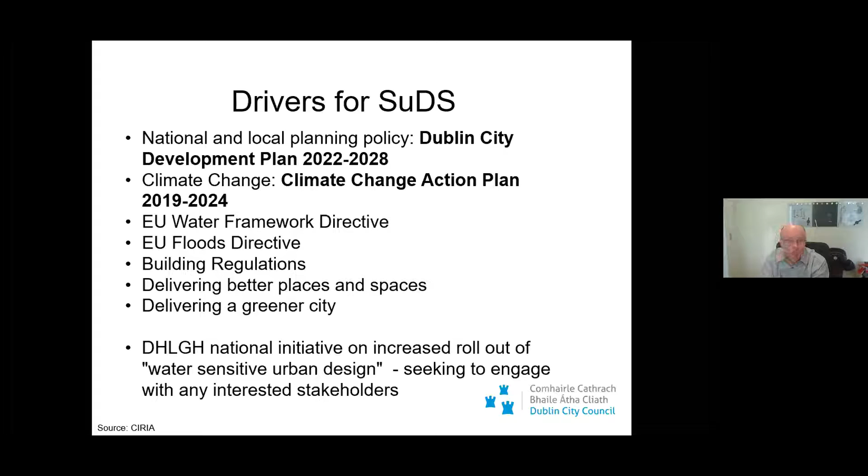I've been talking about SuDS and the assumption everyone knows what I'm talking about. It always strikes me that maybe there are one or two people who don't. What we're looking at basically is trying to mimic natural drainage processes. So you're looking at trying to intercept the water at surface level where it falls. You're looking at managing runoff close to the source.

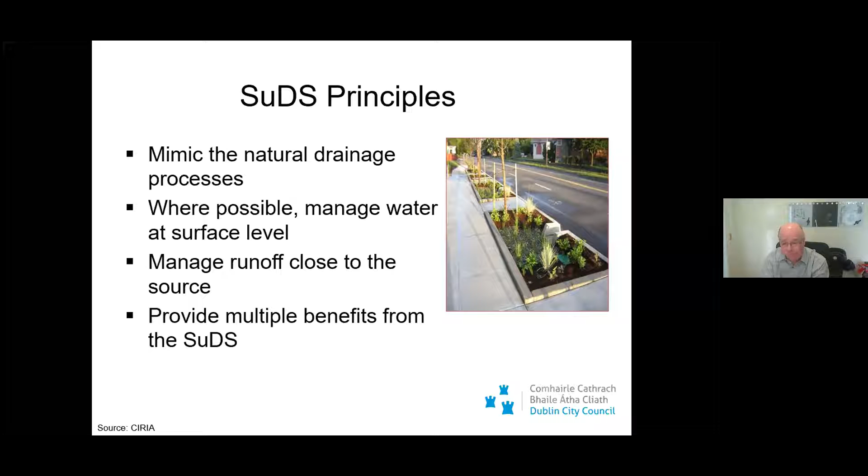That's much better for water quality. It's much easier to deal with it spread over a larger area rather than trying to put everything into a little pipe and looking after that further downstream. There are multiple benefits to be got from SuDS. They include your water quantity and quality, like we've already talked about, but they can also give you a great biodiversity gain.

And I think only in the last couple of days, Dublin City Council went to public consultation on a new biodiversity action plan. That's something you're going to be hearing a lot more about. We're all aware of, I was going to say birds and bees, but certainly pollinators. There are problems there. There are a lot of issues where we're losing biodiversity, and one of the key things in tackling climate change is to get it back.

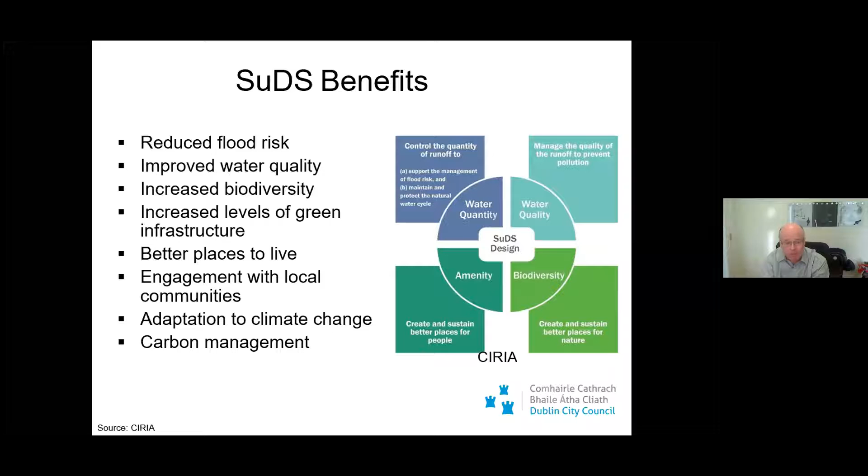SuDS well designed can also give us amenity for local communities, can help us to adapt to climate change, can help us with carbon management. I won't talk in any great detail on the SuDS management train. This is a concept some of you will be aware of.

Again, rather than putting everything into a pipe down to a big tank and trying to deal with it there, the idea is you deal with your stormwater in a couple of different places. You take it out as you go along. You're dealing that way with your quality issues, and you're dealing with your overall volume.

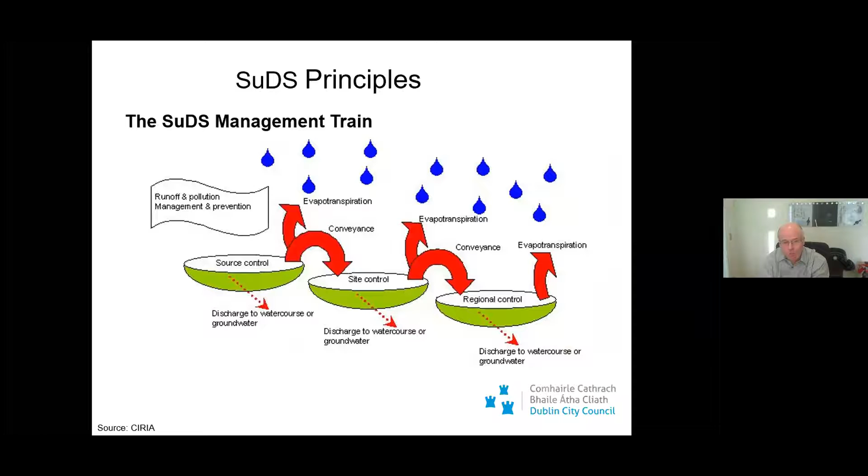I'm going to just talk very briefly about a couple of different SuDS types. I'm not going to start going into green roofs or whatever. That's not really relevant to this talk. I believe there's massive potential in urban transport projects for porous or permeable pavements. Sometimes you can get a bit of bad press. Sometimes people on roads believe these things won't stand up long term.

The fact of the matter is we have permeable pavements in container docks in South America that are standing up 30 years later. If these are well designed, they can function just as well as anything else. The idea, again, for anyone not familiar, and I assume most people are, is that water, rather than running off to a drain, actually soaks down through that surface.

You're dependent on a bit of infiltration, but not necessarily either. Even if there's no infiltration potential, you've got quite a lot of storage underneath there. You can have an overflow to a surface water system. It will slow down and absorb a lot of your problem water.

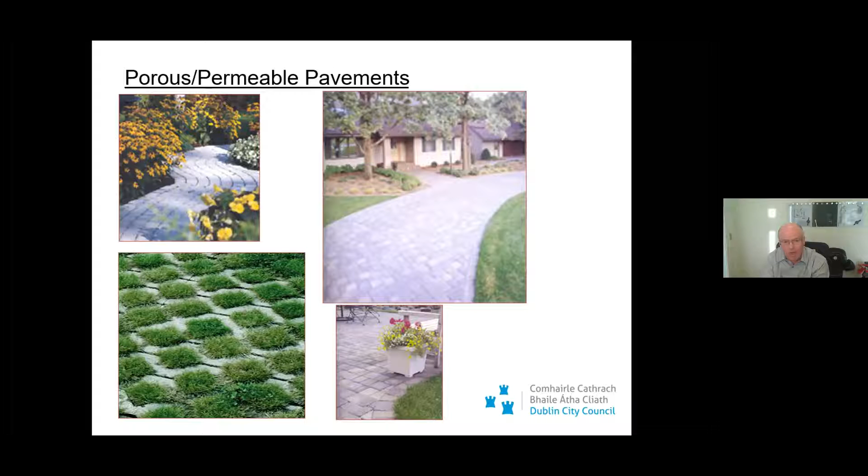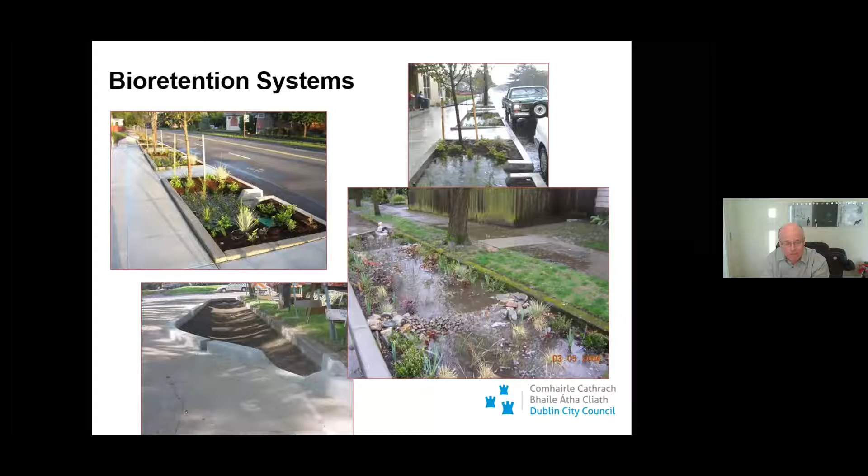Bioretention systems I mentioned already. Again, huge potential for use of these in urban areas. Again, the idea is water goes into the bioretention area. It can either be taken up by plants who need it anyway, it can sit there in storage, you can have filtration media underneath it. You can have a certain amount of storage before it overflows to another system.

Infiltration, I've already mentioned. You will hear people talking about boulder clays in Dublin and lack of infiltration capacity, but even with boulder clays, there is some small bit of infiltration all the time. And again, most of the time what we're trying to deal with for quality is our smaller storms. These kind of systems with a little bit of storage will take those storms no problem.

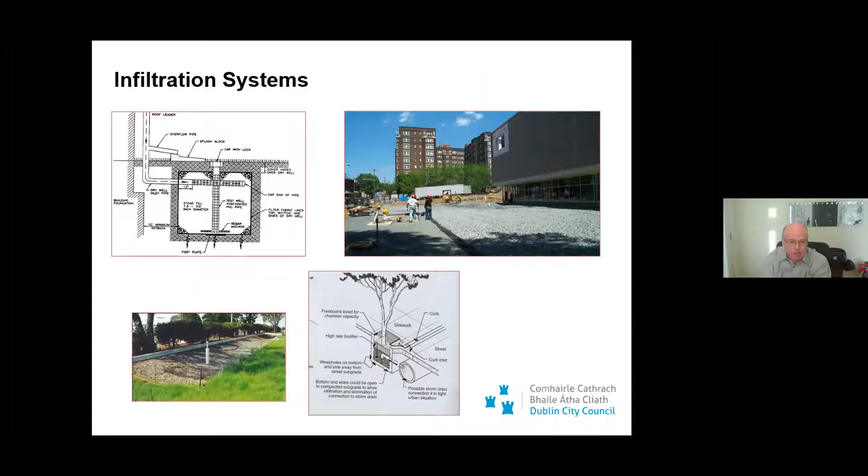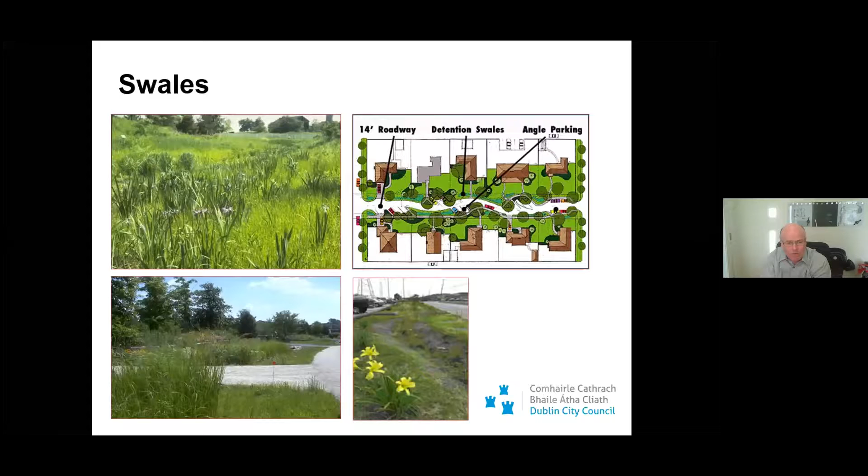I'm not going to talk too much about swales. Swales are probably very relevant in housing estates or areas where you have a bit more space, possibly less so in transport projects. But again, if they're done well, a swale can work even in a relatively dense area. Rain gardens, again, similar to biofiltration.

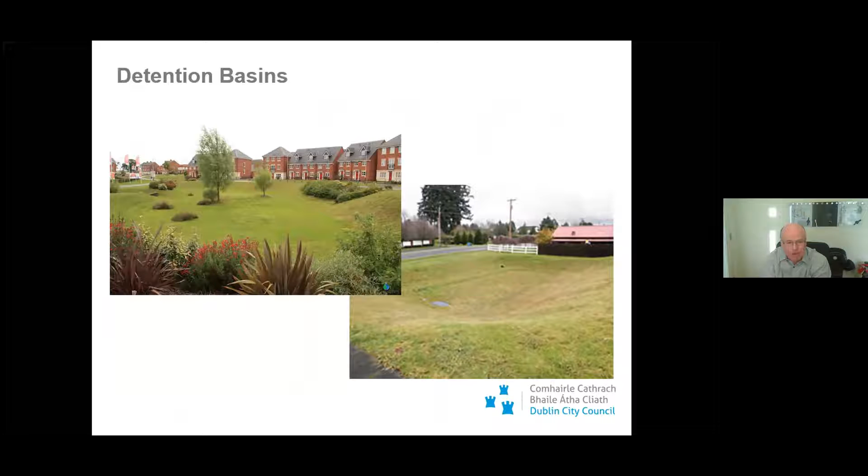Detention basins and retention ponds are quite similar ideas. Again, you can have a certain amount of amenity value here. But also importantly, you may say these can't be used in urban areas. You know, there's always potential to use a roundabout. There are always little areas that can be considered. So there may well be potential for these in transport schemes. Retention ponds, probably less so. Again, you see these in motorways to an extent, less so in urban areas, but they have got potential.

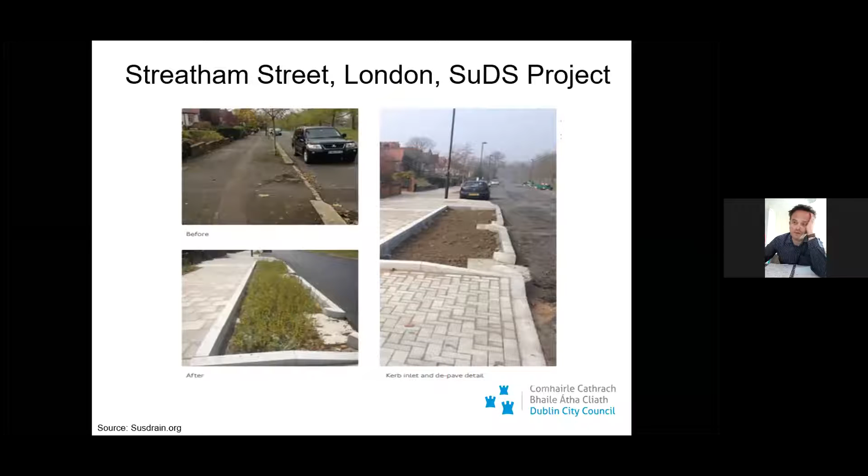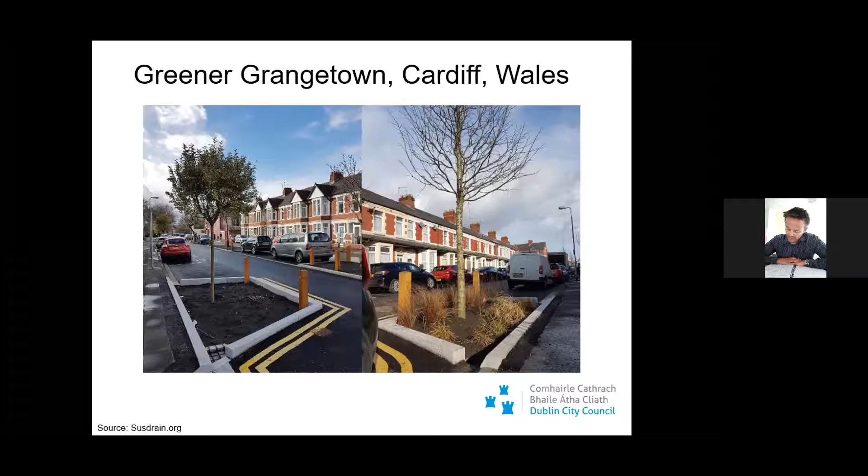The next one is Greener Grangetown in Cardiff, Wales. This is a massive project where they retrofitted about 108 rain gardens into Cardiff city centre. This removes 40,000 cubic meters of rainfall runoff from entering the combined sewer network. That's about 20 swimming pools that they are saving from getting into the combined network over the space of a year. Now that's a massive volume of rainfall runoff.

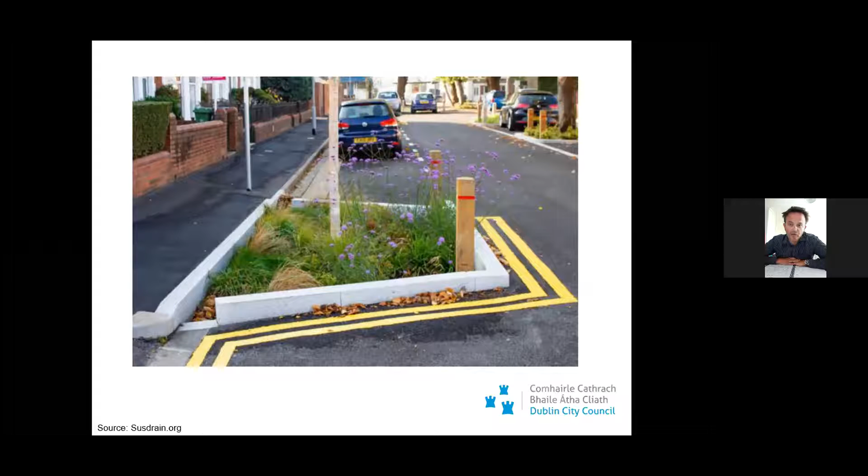The next project is the Grey to Green Sheffield project, where they put in a 1.6 kilometre green street with rain gardens, swales, bioretention systems in the city centre. Now this project is one of the biggest retrofit projects in the UK, and I just think it'd be excellent if we can get something like this in Dublin. Even a small percentage of this in Dublin would be just excellent. There's a few photographs there, Park, if you want to click through.

You want that one, Neil? Yeah, this is how these systems work. Basically, they take the runoff from the roadway, and they store it at the surface level. Therefore, it either attenuates slowly and goes back into the combined network, or it infiltrates into the ground underneath.

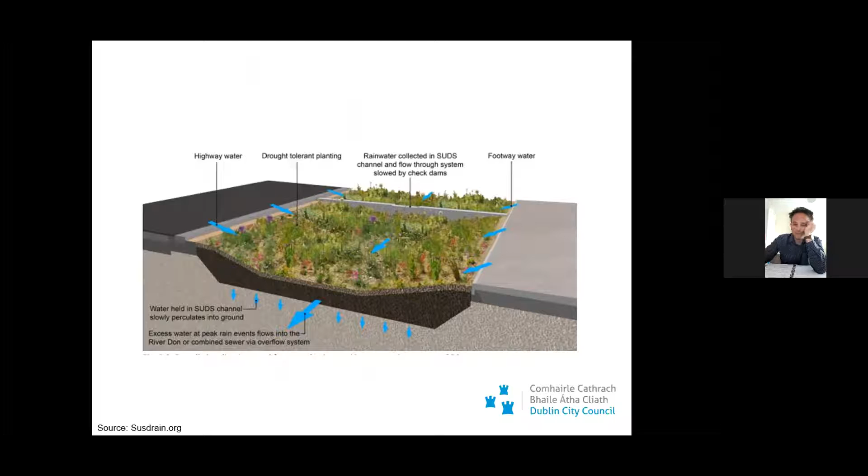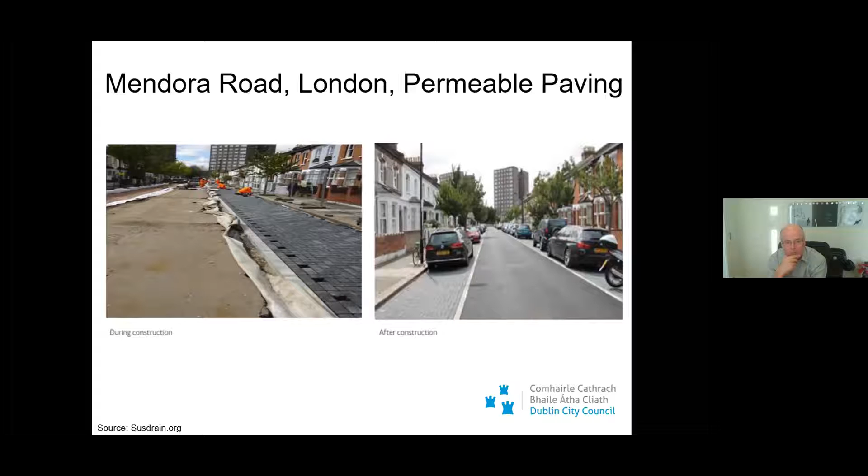Next slide there, please. Worth mentioning there too, Neil, that you're removing the need for a piped and gully system, or even if you want a couple of gullies for overflow, there's a much lesser requirement for them in that kind of system. Yeah, correct.

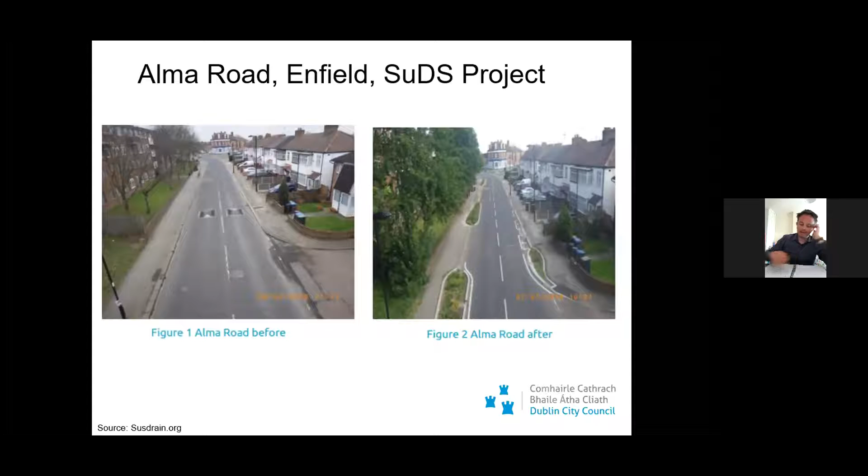Again, another example, over in the UK, is Alma Road, Enfield. This road had a number of issues with flooding and pollution into the local river. Basically, it's a retrofit scheme where they've retrofitted a number of rain gardens into the street, and this has reduced flooding and pollution. They did a few calculations on this, and the rain gardens actually store a 1 in 5 year storm event, which is very impressive.

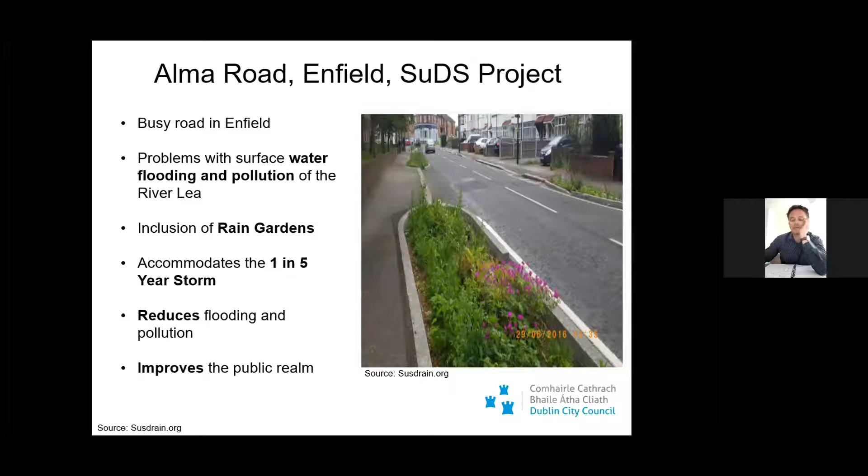If you look at the next slide, you can see it improves the public realm too, with nice plants and greenery. So it benefits so many different aspects. Next slide there, please, Padraig.

This is a scheme, again in the UK, in North Street, Keighley. This is an example of where they've retrofitted a number of tree pits. Next slide again. Basically here they're adding an extra traffic lane, and these tree pits were put in. They act as stormwater attenuation and treatment pits, where they actually store the water and treat it. A few calculations were done showing they store a 1 in 30 year storm event, which again is an excellent storage facility.

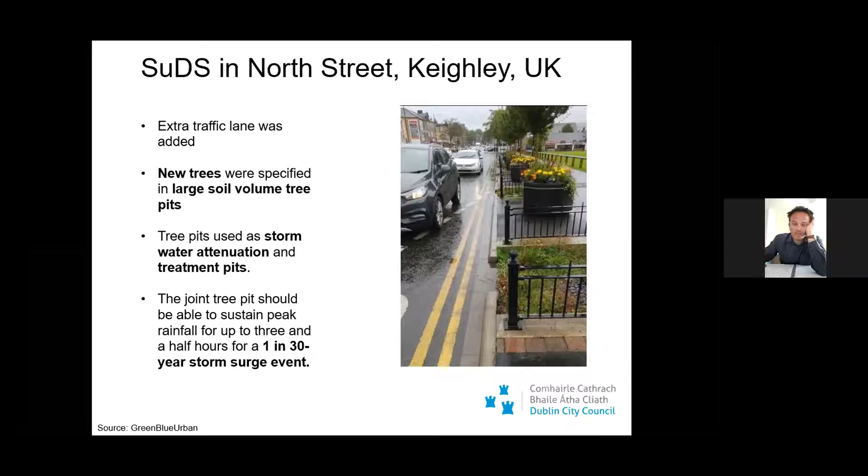As Padraig was saying earlier, we're trying to capture the rainfall runoff on the street surface for as long as possible before it either goes back into the combined network or infiltrates into the ground. So all these types of SuDS are actually very helpful. Next slide there, Padraig, please.

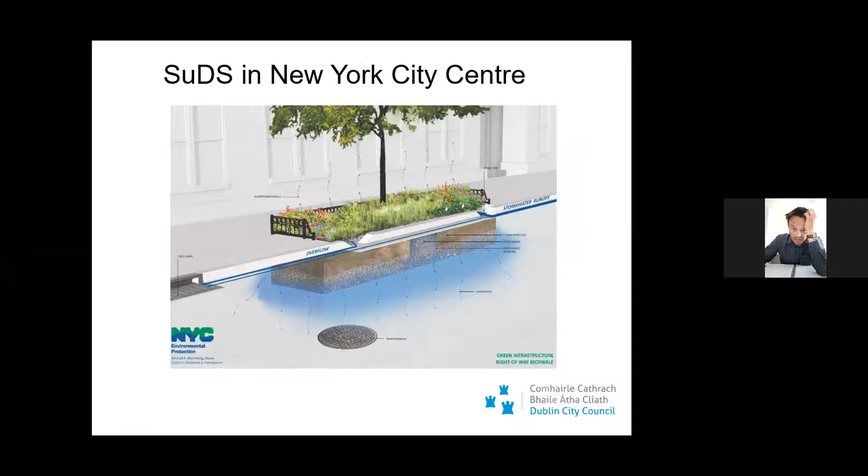In New York, they've put in a number of rain gardens. Would you believe they've put nearly 3,000 of these rain gardens into the city centre? There's a few more slides there, Padraig, just to see how these rain gardens operate. Like the numerous examples before, these store about 5 or 6 cubic meters of rainfall runoff from entering the combined network in New York City. So again, it's the same principle.

They're storing the rainfall runoff on the street surface and slowly releasing it back into the combined network or infiltrating it into the ground. So again, this is reducing your flooding incidents. It's reducing your combined sewer overflows into the rivers, so reducing pollution into the local rivers. So some of these are just excellent ideas to incorporate into the road structure.

Now, with all the projects ongoing in Dublin City, such as BusConnects and some of the big cycle projects, which we'll talk about later on, this would be an excellent idea, even to trial it for a couple of hundred meters, just to see how it would work and if it could be incorporated on a bigger scale. It would be good just to trial it out and see if it helps to store the rainfall runoff. It's just something that I've seen recently. Next slide there, Padraig, please.

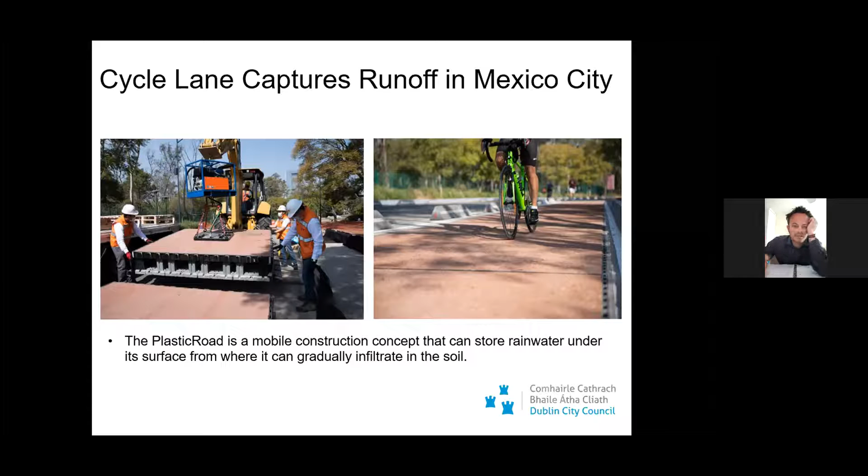Opportunities to implement SuDS in Dublin. Dublin City Council came out recently with the Public Realm Master Plan. This is a huge plan for the public realm in Dublin City, with 90 plus projects proposed over the next 10 years. So there's huge potential to put some of these SuDS that I've just shown you into some of these upcoming public realm projects. Next slide there, Padraig, please.

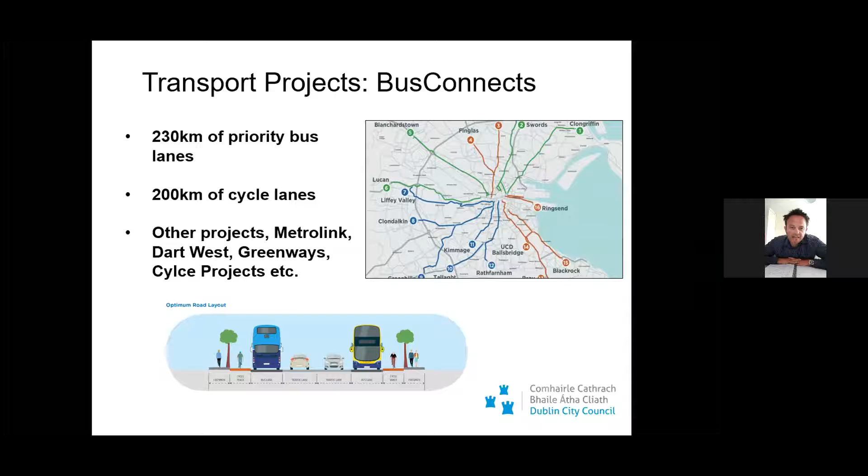Again, there's huge transport projects ongoing. You've got BusConnects, Metrolink, the DART West, greenways, cycle projects. BusConnects itself is 230 kilometers of new bus lane and 200 kilometers of cycle lane. So there's potential there to put in a number of these examples we've seen, like rain gardens, bioretention areas, swales, wetlands. There's definitely potential there for this. Next slide there, please, Padraig.

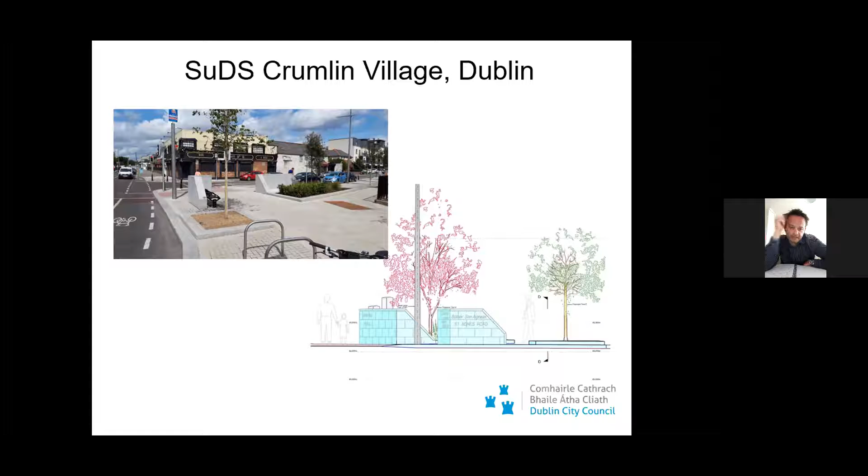So again, as Padraig was saying earlier, you're basically slowing down the process of rainfall runoff going into the combined network, and mitigating against flooding problems and CSO problems. So this is a very, very good example. The next slide then, Padraig, is another example of SuDS in Chatham Street. This is the park section.

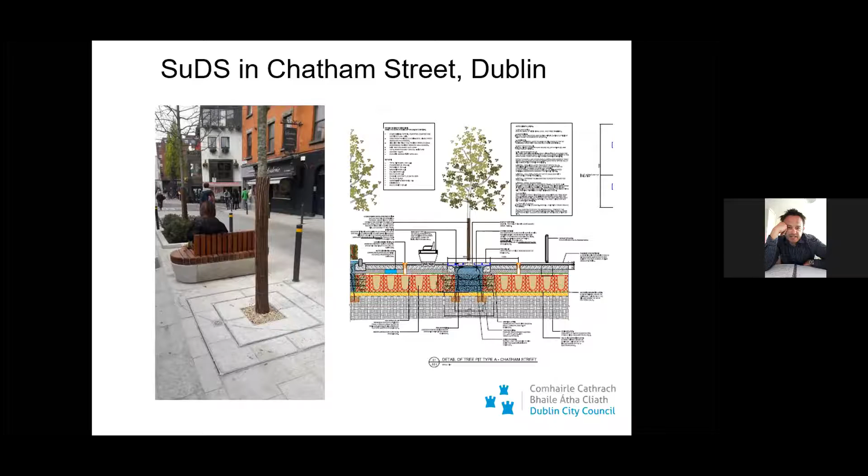I put in a number of tree pits and rain gardens in Chatham Street. Again, it's the same principle. These systems are taking the rainfall runoff off the pedestrian zone there, quite a significant area. And this is inner city Dublin. This is just off Grafton Street, where the whole area is serviced by a combined network.

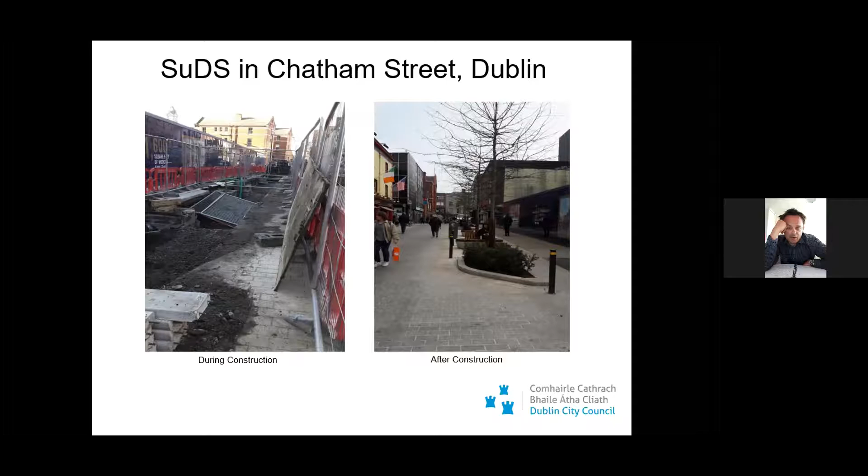So these tree pits, when it rains, the runoff will go into these tree pits and the large storage areas within them, and it'll be stored in there and then gradually fed back into the combined network. So again, this is a great case to show where we're trying to mitigate against flooding and CSO spillages. Next slide there, Padraig, please.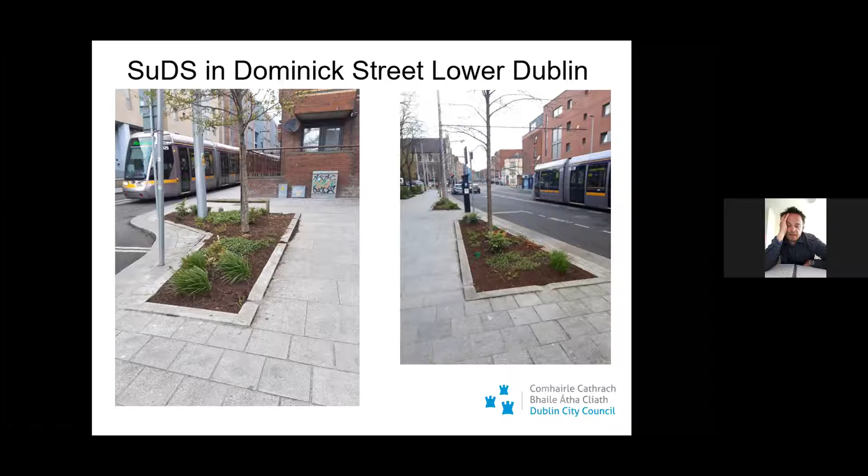So these things do work, you know, if they're put in place and they're well maintained and managed, they will work. So they will work in Dublin City, and I've already shown you a couple of examples of the UK, but there's so many examples of these around the world, and there's no reason why these can't work in Dublin city centre, you know. Next slide then, Padraig, please.

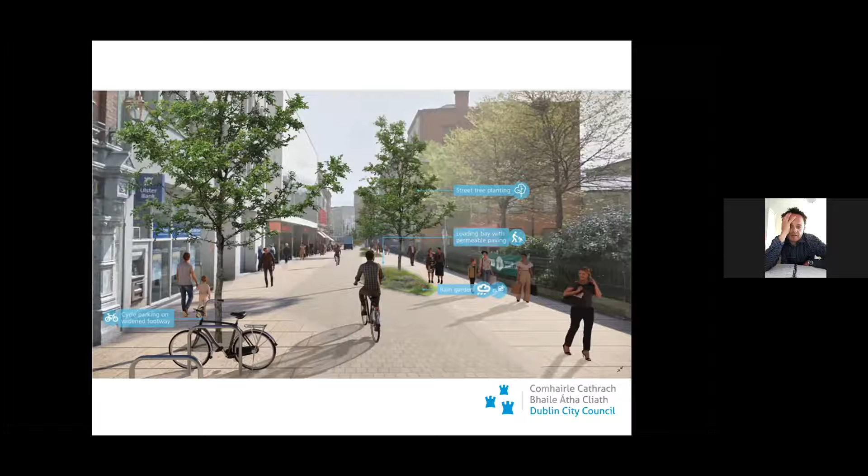This is a project we're working on in Suffolk Street. It's just a public realm project, and it's an example of where possibly we could incorporate some rain gardens and tree pits into the fabric of the road there. I think it's going to be pedestrianised anyway, but it's a very good example of where there's possibility of incorporating rain gardens and tree pits and these SuDS systems that we've shown.

And then again, this is part of the Suffolk Street project too, where at the junction of Suffolk Street and Grafton Street, there's a potential maybe to put in a rain garden to capture the runoff from Grafton Street. The big problem with Grafton Street is there's a lot of granite on it, and when it rains, the runoff flows very quickly off that granite, and it all flows down Grafton Street to this junction. So there's a potential here to put in some sort of rain garden to capture that rainfall runoff.

And it's again back to the two issues it's going to resolve. It's going to resolve flooding in this local area, and also it's going to slow down the rainfall runoff going into the combined network, which again serves this area. It actually looks very well too. This is only a photo montage, but this looks good. If it's well maintained and managed, it'll enhance the whole area, you know.

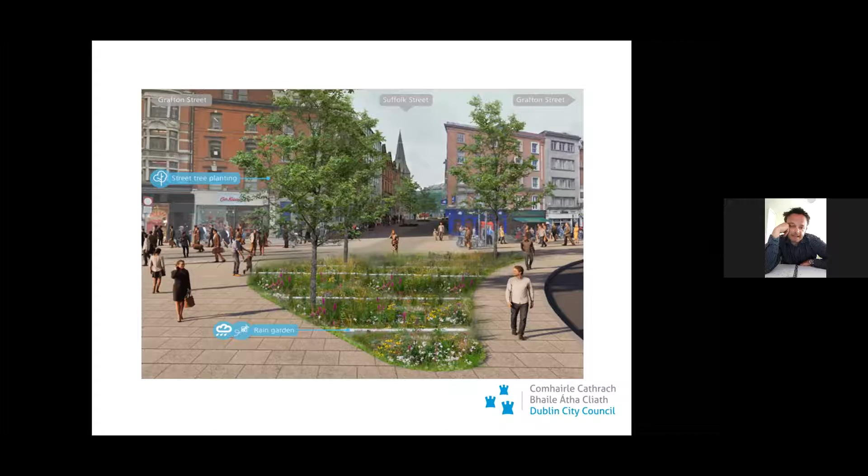And obviously it's also got all the other benefits that Padraig has already mentioned, the amenity and the biodiversity and numerous benefits from it. This is just an overview plan of the scheme. Again, it's still work in progress, and I think there's 2 or 3 rain gardens proposed, and maybe 3 or 4 tree pits proposed for this area.

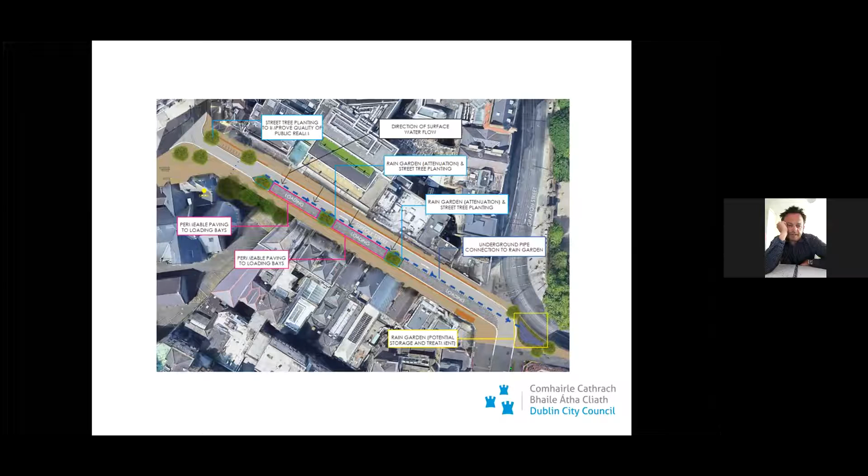And I think it'd be good if we can get something like this on the ground in Dublin City, and maybe link it in with some research project just to see how these things perform in Dublin City over a year or so, and just to get a bit of data. The next slide there, please, Padraig.

Like at some of the projects that I was showing you earlier on, there's one there in Cardiff. The one in Cardiff was the Greener Grangetown in Cardiff, Wales. That was a joint project between the local authority, Cardiff City Council, and Welsh Water. So they came up with an agreement to put in the SuDS systems, and also there was an agreement in place to maintain them going forward. So it's just interesting, some of the case studies you see from the UK on how these things are actually put in place and how they're maintained.

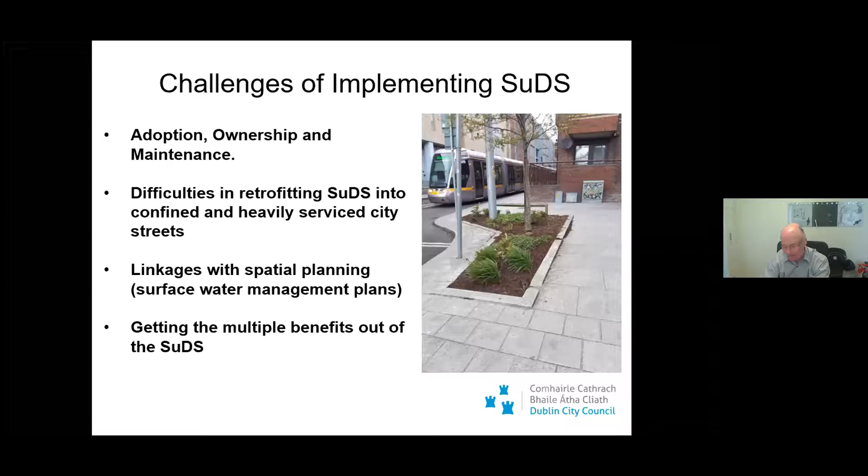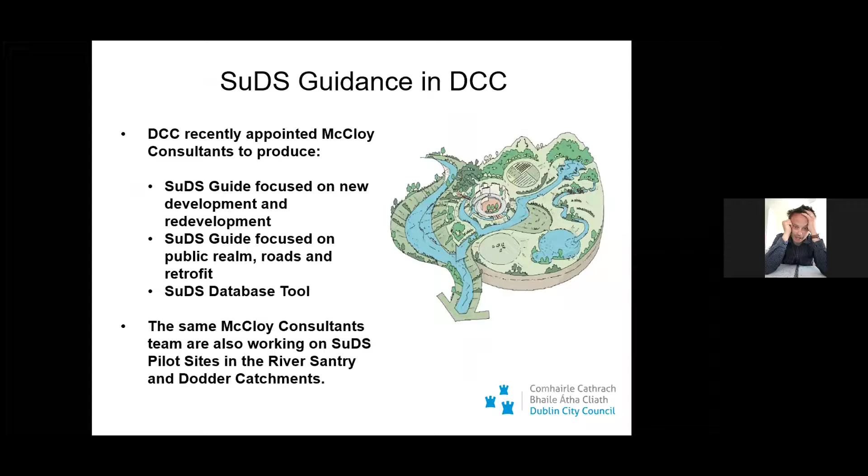Yeah, fair enough. I have that mentioned in the next slide. So basically what we're doing currently in Dublin City Council, we have appointed a consultant, McCloy Consultants, to produce a SuDS guidance document for DCC. There'll be two guides. The first guide is going to be focused on new development and redevelopment. And then the second guide is going to be focused on public realm, roads and retrofit. Now, McCloy's were appointed for this way back in September.

And there's been a lot of workshops and meetings and a lot of discussion between departments and sections in DCC to see exactly what we want here. And as Padraig already talked about, we've set up a whole SuDS working group where we have representatives from parks, roads, city architects, planners, housing. Nearly every section or department in DCC is included in this working group. And we're trying to all work together to come up with a guide that works for everybody. It doesn't just work for drainage. It works for parks, for roads, for planners, for architects. We're trying to bring everybody on board. I think it's very important that we bring everybody on board to produce this guide.

Because there's hundreds of guides out there on the internet, loads of them, and there's not too many good SuDS examples in Dublin. So we have to try to change that. There's plenty of good examples in developments, but we're trying to get as many SuDS as possible now into the public realm and into these big transport projects. And I think this guide, with the backing of all the different departments and sections, will actually help us. It'll give the likes of BusConnects and all the different big projects an idea of what we want and what's agreed by the different sections in DCC. Drainage agree with it, parks agree with it, roads.

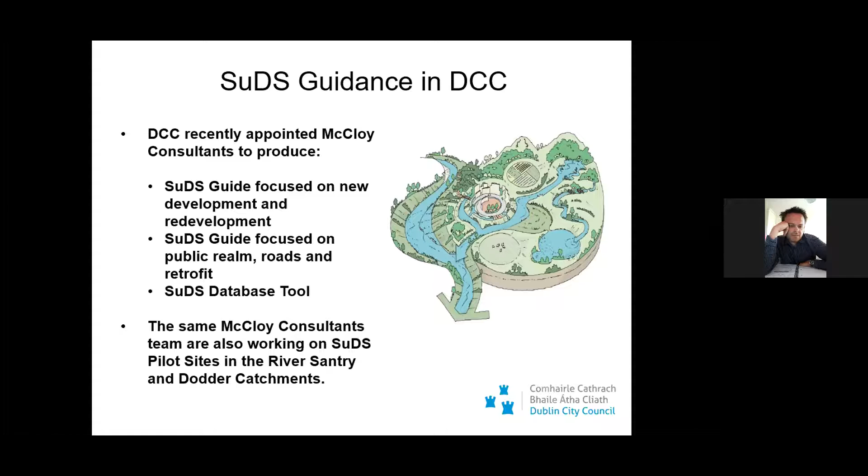Just to mention also, the McCloy team are also working on SuDS pilot sites in 2 catchments, the River Santry catchment and the River Dodder catchment, where they're looking at, I think, about nine pilot sites where they're going to start incorporating a lot of the examples I've mentioned before, the rain gardens, tree pits, wetlands, swales. They're going to start incorporating them into the fabric of the road and into the residential areas, and then they're going to see how they perform over maybe a year or 2. And I think this will be very valuable just to see how these systems perform in an Irish context. And I think that project is very exciting.

Again, the whole cross-departmental approach is so important. You've got to have drainage, parks, roads, planning, architects, housing. You've got to get them all on board, or it's not going to work. We've seen this over the last number of years of great SuDS ideas, and they just never happen. So if we get everybody on board, then things will happen.

Another important point is SuDS design has to be multidisciplinary. You just can't have a drainage engineer there. You have to have your landscape architect. You have to have people experienced in biodiversity. You've got to get a whole team of different professionals in there to look at this. There's so many different components to a successful SuDS that it has to be multidisciplinary.

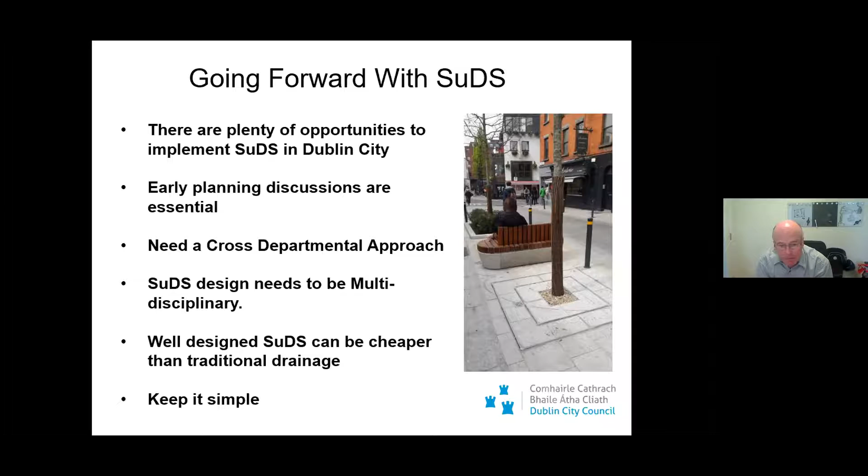Again, just to reiterate, this is something we're not doing for fun. There really is no other option out there in terms of helping protect the city against flooding and helping to preserve our water quality and make sure things improve or at least don't get any worse. So this is a vital part of what we do. We are very, very aware of the pressures some of you guys are under in trying to get traffic infrastructure built in the city. There are certainly clashes there, but these are all issues we can work together on, and we feel there is great potential, as Neil says, to introduce these measures in Dublin for everyone's benefit.